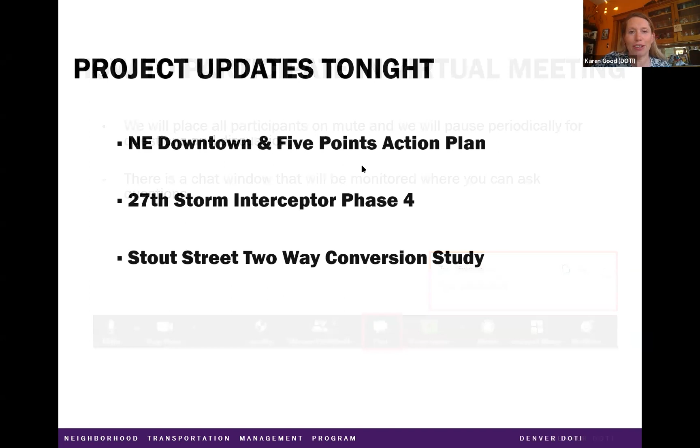Riley, if we can go to the next slide. So I've been mentioning that we're going over a number of projects tonight. One is the namesake, the Northeast Downtown and 5 Points Action Plan. We also have a project update on the 27th Storm Interceptor Phase 4 coming soon, and then the Stout Street two-way conversion study. So a lot of information, and we want to be able to have a conversation with you.

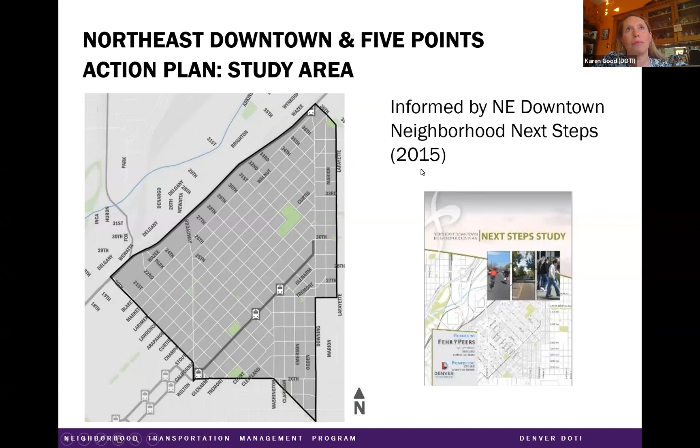So I am going to talk a little about the study area. I know a lot of you have been really engaged and very aware of the Northeast Downtown 5 Points Action Plan, and the study area encompasses 5 Points and goes a little bit outside of the Curtis Park 5 Points area, so that we're capturing the edges there. This is based on that Northeast Downtown Next Steps study from 2015, and pulls in information from a wide number and variety of other plans in the area.

So with that, a chance for you all to speak. We will be having 2 polling sessions, each with 2 questions during the course of this meeting. A polling window will pop up on your screen. Just follow the instructions to select your answer, and we'll close the poll in 1 minute. It should have popped up on your screen already.

There's a little clock ticking there to tell us a little bit about your relationship to the area and how you interact with the neighborhoods here, whether you live here, commute here, use it for recreation, school, etc. There's a little bar there so you can scroll down. There's a lot of info there, and it looks like we've got 50% of people participating, and I know a few people are just popping on. So we'll give it another couple seconds.

Looks like we've got a lot of folks that participated, and for question 1, we have the highest percentage of folks that live in the neighborhood. A few folks commute through, and people use it for recreation and shopping, events, etc.

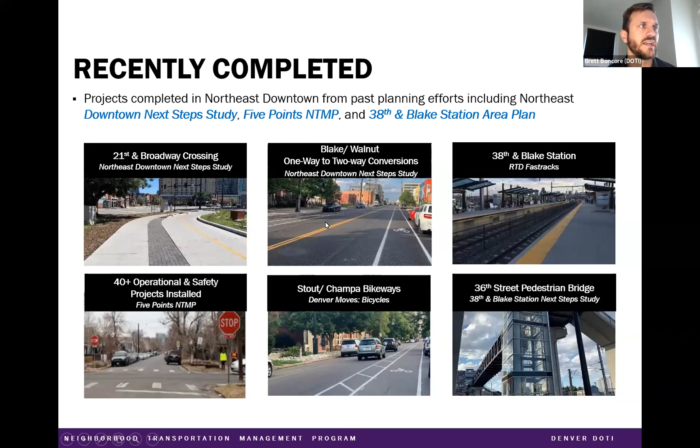corner that's going to be coming into the Northeast downtown and 5 Points neighborhoods. If you go to the next slide, if it works. Okay, cool. And these projects, like I said, they're coming soon.

We're actually in the middle of procuring a construction contractor for these right now. So they're right around the corner for us in our world here. And these came directly from the 5 Points NTMP action plan that occurred a couple of years ago. There's 6 projects that came directly from the NTMP plan.

You can see here just a couple highlights. The RRFB at 32nd and Champa, that's the rectangular rapid flashing beacon, basically helping to bring more awareness to the pedestrian crossing there right next to the park. And then as well as kind of enhancing Champa and Stout streets with some painted bulb outs and

making vehicle movements a little clearer, and converting a section of 28th Street just east of Welton to 2-way. That's the section between Welton and the Glenarm Rec Center and the Denver Health Clinic, where it's 1-way, converting

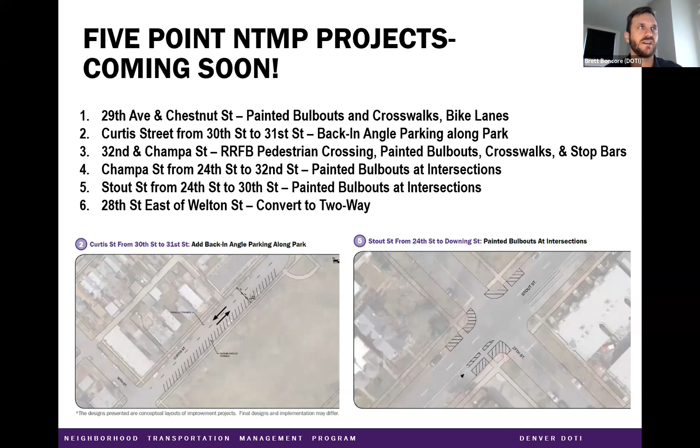it to 2-way, hoping to open up more access into that Welton Street business district and clarify some confusion there and some safety issues we're seeing there.

If you go to your next slide. This is just an extension of the projects that are coming soon. And I think in our last meeting, we mentioned this as well. It should be familiar to most, it's the expanded pedestrian plaza.

So this is at the intersection of Welton Street, 26th Ave, 27th Street, and Washington Street. And what we're doing here with Flex Post and Paint is improving intersection safety at that location by slowing down

turning movements, decreasing pedestrian crossing distances, but also we're getting some space to where we can actually activate that space with art, street murals.

And so we've procured a couple artists to help us do that, to install that street mural and help us activate that space, along with the community in

that area. In addition, along Welton Street, which is also coming around the corner, is flex post and paint bulb outs at some select intersections along Welton Street.

That's at 24th, 25th, 27th, and 29th. Similar to the Plaza project, these are smaller opportunities, but still opportunities to improve pedestrian safety and increase placemaking.

Those artists will be painting street murals in those as well. You can see a photo here on the bottom right of a recent similar implementation on Santa

Fe Drive. And then I just wanted to give a quick plug to the Stout Street two-way conversion study, which also came out of the NTMP, which will be talked about later in detail in this meeting.

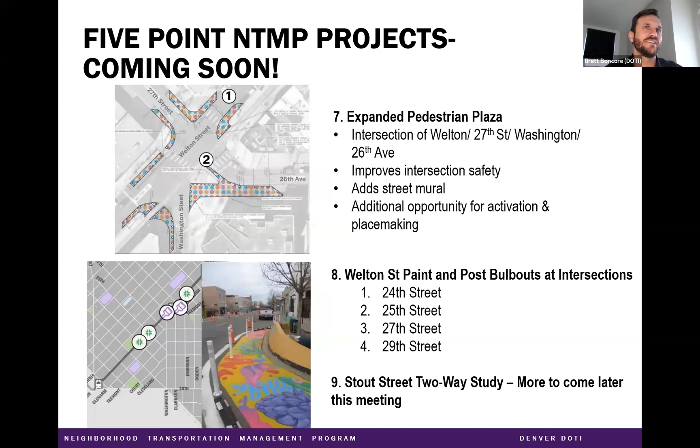And one quick thing before we pass the mic to Riley, Brett, can you explain our acronyms of what we affectionately call NEDFP and NTMP? Yes, sorry about any confusion there.

NEDFP stands for the Northeast Downtown and 5 Points Action Plan. That's the study area that Karen had presented earlier, encompassing all the neighborhoods in the Northeast Downtown Next Steps study. NTMP is the Neighborhood Transportation Management Program, a program that goes throughout all of Denver's neighborhoods, prioritizing them according to equity, multimodal demand, and safety to do neighborhood-level traffic calming and infrastructure projects.

Awesome, thank you so much. Riley, can you fill us in a little bit on the community survey results and process?

Absolutely, my name is Riley Lemie, I'm with DOTI, the Denver Department of Transportation and Infrastructure, City Planner. I'm going to talk about the Northeast Downtown 5 Points Action Plan process. This is a multi-year program looking at adding transportation infrastructure investments into both the Northeast Downtown and 5 Points neighborhood, a partnership between DOTI and the Denver Office of Economic Development.

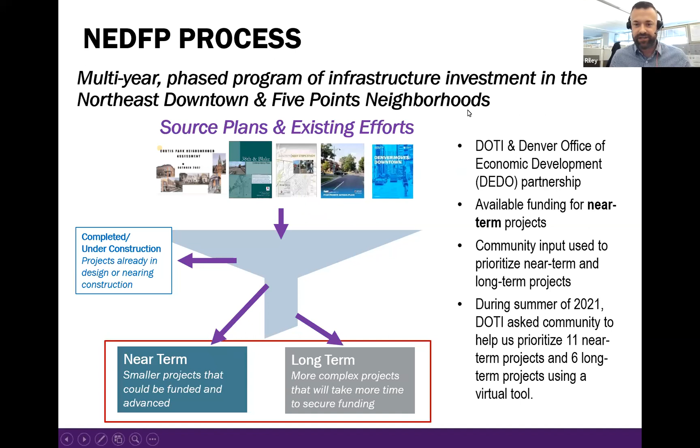To recap, the near-term projects shown on the map represent some of the different projects we asked the community to prioritize. This included everything from the permanent version of the 5 Points Plaza to a lane reduction on Welton Street, and other improvements geared towards safety, streetscaping, or landscaping. We asked the community to prioritize these improvements with the funding available to us, and did that last August.

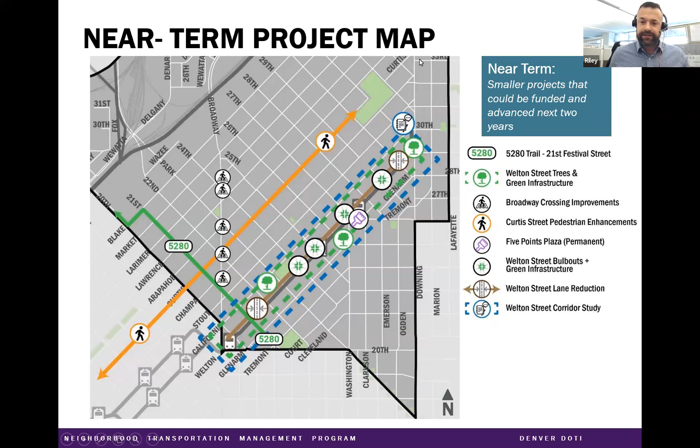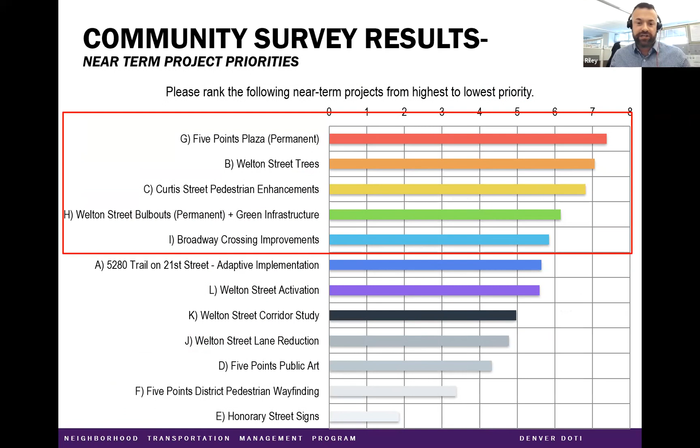As you can see on the graphic, these are the projects that rose to the top. We picked 5 projects based on what we heard, ones we're able to move forward with based on the near-term funding available from the partnership between DOTI and DEDO, as well as ones we can advance by leveraging other resources. I'm going to hand it off to Brett, who's going to go into some details.

I'm going to jump in with a question from the community. Since all of these projects were prioritized, will they still all eventually happen? That's probably a little bit hard to answer at this juncture, but maybe we can talk about that in relation to some of the things happening now and recently completed.

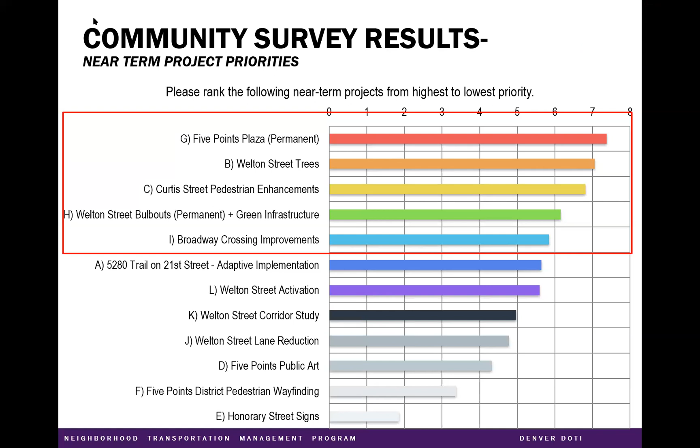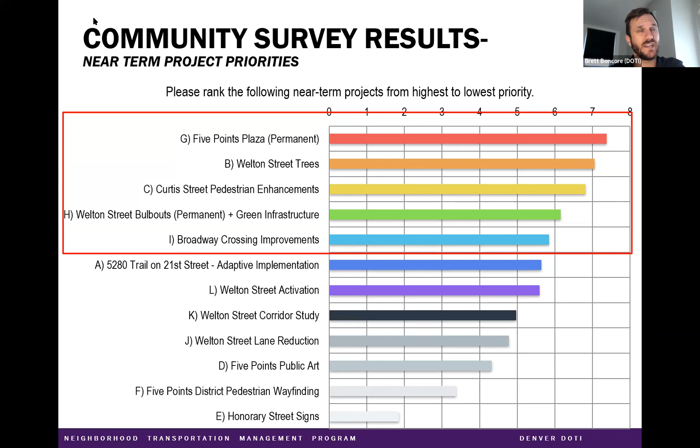We get Welton Street trees. So the short answer is, we have a limited amount of funding to advance. We knew at the outset that we weren't going to be able to do all of the projects on this list, which is really why it was important to hear from the community about which ones were most important to them, because we have a lot of projects and a limited amount of resources. What you'll hear later in the presentation is not that we're ignoring the rest of the projects that didn't get funding, but that these are still on our list to fund and pursue potential funding for in the future. These near-term projects are ones we're prioritizing and can move forward with near-term funds. These are ones that can actually move forward and will have funding through construction.

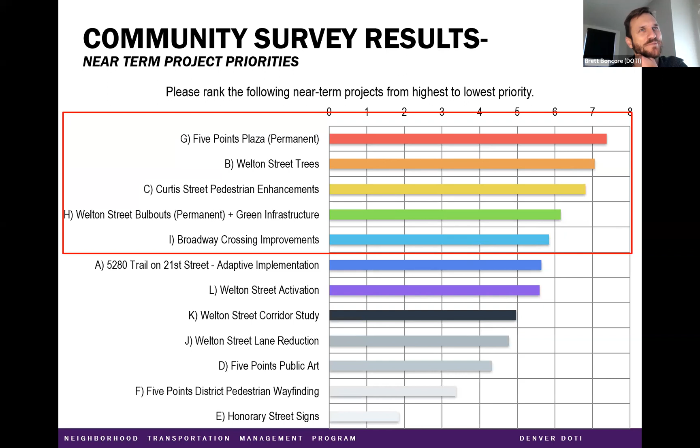Thanks, Brett. That dovetails perfectly into the next slide, which talks about the 5 projects we're able to advance from the community survey.

The first one is what we're calling the permanent 5 Points pedestrian plaza expansion. This was the highest priority project from the survey, the permanent expansion of that 5 Points intersection plaza, at the intersection of Welton Street, 26th Ave, 27th Street, and Washington Street.

I mentioned that we had an upcoming project to expand this plaza with flex post and paint in the near term, in the next couple months. Well, that's a pretty temporary version of that, right? That's an adaptive version with just those flex post bollards and paint.

What this project would do is, once we get to do design and are able to construct, probably a couple of years out, a few years out, we would make this permanent through the use of actual concrete. So this would be like the photo, like the graphic here is showing: raised concrete pedestrian islands with those bulb outs.

Those are the things on the corners that kind of help to clarify the vehicle movements. This also slows down vehicle turning speeds, which in the end really enhances pedestrian safety. That's paramount for us at DOTI.

In addition, the bulk of this though is to really expand that pedestrian plaza that's right there. This is, if you can imagine, right in front of Melody Market, which just opened up at the Point, across from Famous J's and all those businesses right in that area. There's a lot of synergy there, especially with the events.

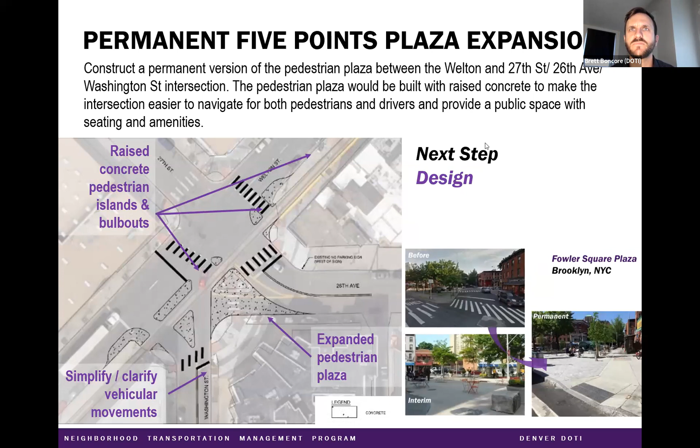Another important priority of the community that we saw from the survey is for Welton Street trees. This is to add street trees to the Welton Street corridor. This is actually, as some of you might know, an existing effort by forestry to renew the tree pits along Welton Street.

To further increase the green canopy in that area. With this currently being underway, really our next step is to continue to coordinate with forestry to fill any gaps that they have and find any opportunities for us to add value to that project and get that green canopy increased. Next slide.

This is another big one. Next project that was prioritized by the community was the Welton Street Streetscape and Green Infrastructure project. Similar to the Plaza expansion project, this project would add bulb outs—those extensions of the curb into the street—to decrease pedestrian crossing distances, which increases pedestrian safety. In those bulb outs, like you're seeing in that photo there, add trees and green infrastructure at the corners.

This not only adds to placemaking in that area, but it also gives vertical elements and helps to even more slow down turning movements and make it a safer place for folks. I mentioned it earlier. Brett?

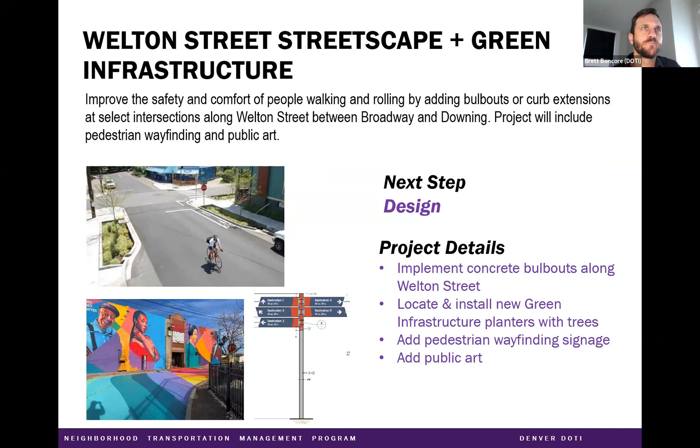Next project is Curtis Street pedestrian enhancements. This came from the Northeast Downtown Next Steps study, and will implement bike and pedestrian safety enhancements at select intersections along Curtis Street, specifically between Broadway and 30th Street. This would typically be in the form of bulb outs and other traffic calming. Next step would be design on that one as well.

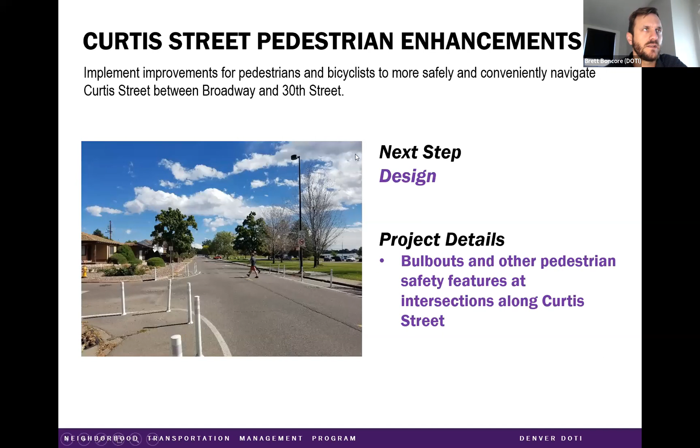This project, the Broadway crossings improvements, is our last prioritized project that we have near-term funding for. This came out of Denver Moves Downtown, an effort that our very own Riley Lemie led, to construct pedestrian and bike improvements at select intersections along Broadway. Broadway is a challenging road between the diagonal grid and the rest of downtown.

So we're looking to design and implement safety enhancements like bulb outs, curb extensions, median islands, and changes to some signal operations favorable to pedestrians at these 5 intersections you see on screen. This picture is just an example of one we did on Colfax more recently; it'd be similar improvements.

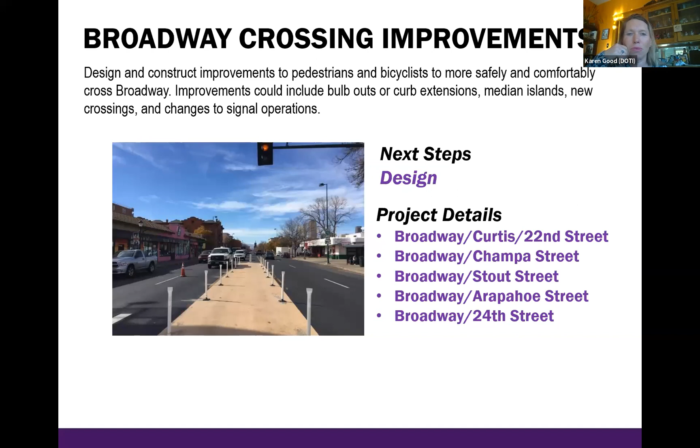Brett, one question that's come up is what is the specific timing for these near-term projects? I don't know that, as you can see most of these are in design, and we don't have a lot more detail on construction timing. That kind of gets to our next steps slide, which we'll explain at that point, since it's all kind of one conversation.

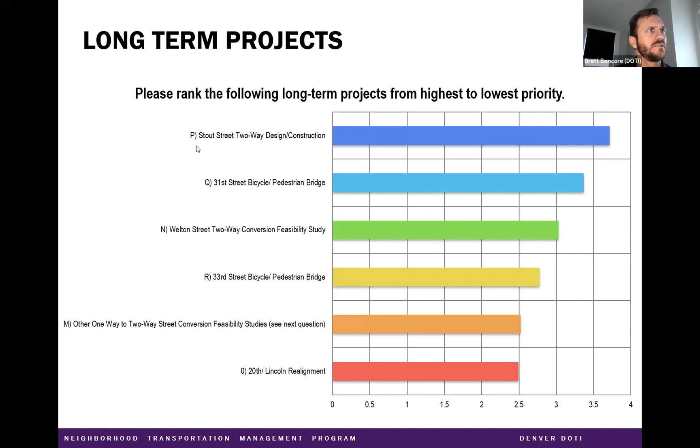As far as next steps, we're at April 6th, that's where we are right now. We promised to report back and present our next steps. This summer, we're going to make sure all our funding is in order, start scoping out these projects, and procure a design consultant. The first thing that needs to happen is final design to make sure everything checks out. Starting in the fall is when we're hoping these design projects would start, maybe bleeding into winter, is when you'll start to hear more activity around each individual project. Construction would happen sometime after that, probably 2023 and beyond, maybe even 2024 for some of these.

I think we've hit most of the questions during our conversation. I noticed somebody has a comment about Stout two-way conversion, so we'll talk about that, we have a whole section on that and a project team waiting to fill you in. And then somebody who jumped on late was wondering about the status of the bike ped bump out or similar for 33rd and Lawrence.

Brett, I am not remembering that specific element, the bike ped bump out at 33rd and Lawrence. I'm sure you do, I sure hope you do.

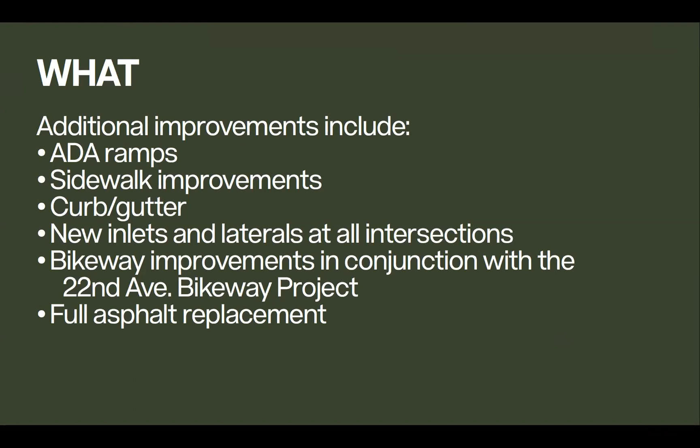And what are we doing? Basically we're going down the street, installing a large pipe to replace the pipe that's in the ground now. On top of that, we're doing new ADA ramps, sidewalk improvements all along the corridor, new curb and gutter, new inlets, laterals at all the intersections. I believe we're going about 4 blocks on phase 4. We're also helping with some of the bikeway improvements in conjunction with the 22nd Avenue Bikeway project. And the big thing—it'll be all new asphalt all the way down from basically 25th Avenue to just south of 22nd Avenue. So it'll be a big improvement.

You don't say. Absolutely, we're going to become friends with everybody in the neighborhood. I'll be the one on site, so if you see me running around on site, feel free to stop me.

Should we take any questions coming in? No, that was the big one. Okay, let's move forward and open it up. You again, Aaron, you know. Okay, no problem.

So here's a slide that shows the why. This is 27th Street and the 5 Points intersection on Welton. You can see there's quite a bit of surface runoff that ends up inundating the storm system there, causing flooding to residents as well as businesses. To the right, you can see the entire basin that drains down into that area, called the Lower Montclair Basin. It's a pretty wide area, so the amount of water that ends up in that intersection is quite a lot.

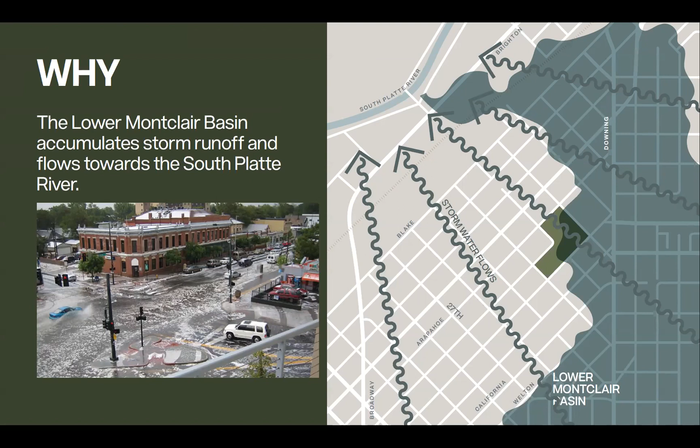So that's why we need the larger storm sewer pipe.

So the when - we're hoping to bid this project this summer. We don't have an absolute deadline, but it will happen sometime this summer. We do expect construction to begin in early 2023 - January, February, March, somewhere around there.

This is some of the how. This is very similar to what you'll see on Washington Street, and probably similar to what you've seen on our current project, phase 3. We have large equipment that needs to come down the street to install this large new pipe in the ground, and this is the shoring system that keeps all the workers safe underground. It's pretty invasive - we come through, trim all the trees, remove all the curb and gutter in the road, and then put the pipe in the ground. It's very, very involved, and very loud.

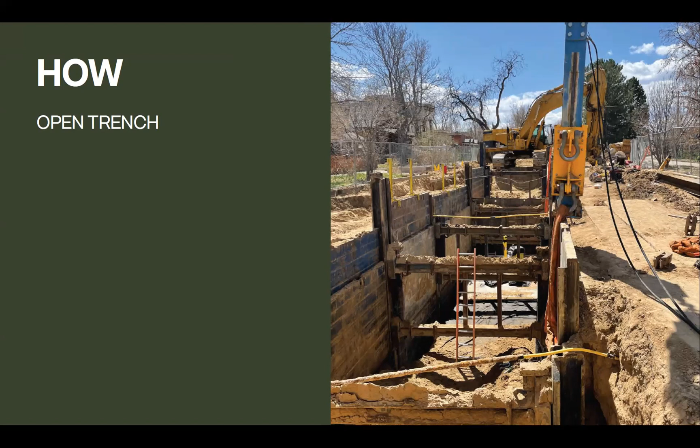But we do try to march down the road as quickly as possible so we don't disturb anybody for too long - and safely, right? Yeah, absolutely. Safety is our number one goal, and that's why we have the fencing on the sides as well.

Impacts: we're looking at closing only 2 blocks and 2 intersections at a time. Mainly that's to give the contractor room to spread out with their equipment and materials, and room for storage. Pedestrian access to residents and businesses inside the project area will always be open, and we'll have signage clearly defining any detour routes, whether for pedestrians or traffic.

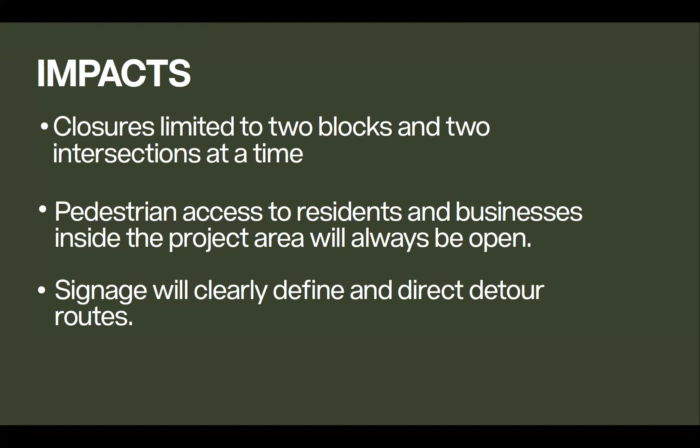Great, and I saw somebody taking a picture of the screen - we will post this meeting info on our website so you'll be able to get it there. I haven't seen any questions. David did have a very fine comment that they must have hired very short masonry workers over 100 years ago.

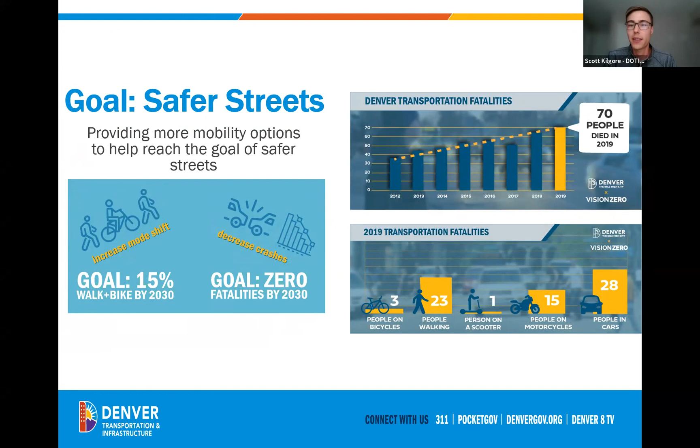So our goal here is to create safer streets. DOTI is really all about safety. One of our top priorities is Vision Zero, having zero fatalities on our streets. And that's really a main driver of this project and in all the work that we do. So if we can go ahead and jump to the next slide.

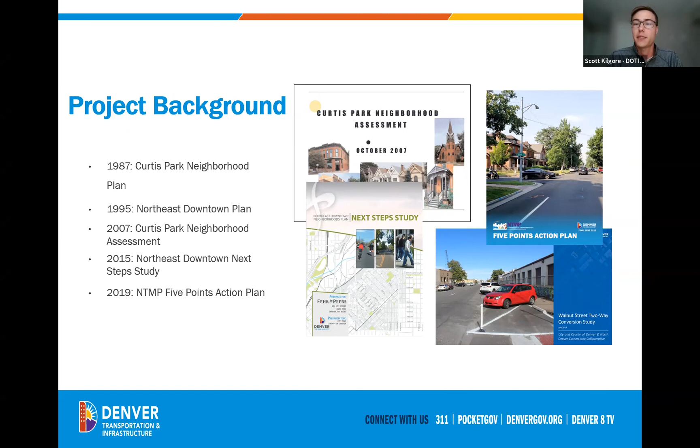As I was saying, the Stout Street two-way conversion study has been identified in a number of different planning efforts in this neighborhood, going all the way back to the 1987 Curtis Park neighborhood plan, and was further mentioned in 1995, 2007, 2015, and 2019. Most recently, out of the Five Points action plan and the prioritization process of different improvements in the neighborhood, this project really rose to the top. So that's really what brings us here tonight and why we're looking at this.

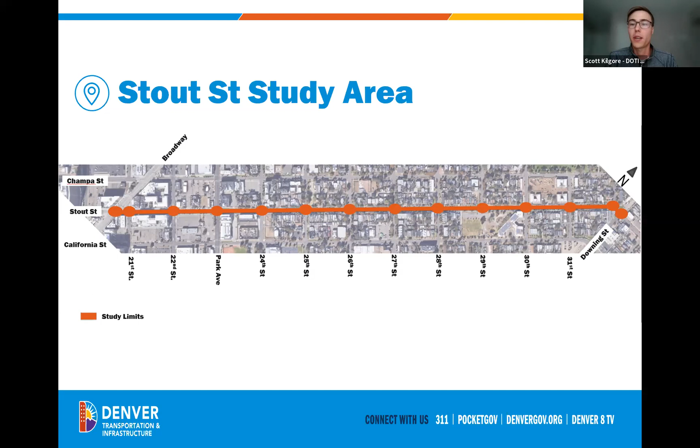The study area we're looking at for the Stout Street two-way conversion study is Stout Street between Broadway and Downing. Part of this project is figuring out whether all of this stretch should be converted to two-way, or just some of it. So that's really one of the main reasons we're doing this study, to flesh out those details and get a better understanding of what we're going to do here to improve Stout Street.

So next, we've got a couple polling questions. Are you ready for the polling? It's polling time again. Oh boy.

So a pop-up window is going to happen. We just did this, so for anyone new, please answer the pop-up window with the poll, about what's your relationship with Stout Street? Are you besties with Stout? Are you enemies with Stout? Do you live on Stout? Do you use it for recreation? Is it part of your bike route, your running route, your walking route, where you take the bus, where you go to school? You can select all of the above. So let us know, that's just helpful for us to understand.

Gerald, yes, you are welcome for referencing how many years the Stout Street two-way conversion has been part of the conversation. I know it was a healthy conversation in the Stout Street, in the Curtis Park assessment. So it looks like we've got a lot of answers, and the most popular is: I live along or near Stout Street. So thank you for that.

And then folks recreate and go shopping and commute and access transit. Doesn't look like we have any school goers here. And then let's do question 2 for the poll.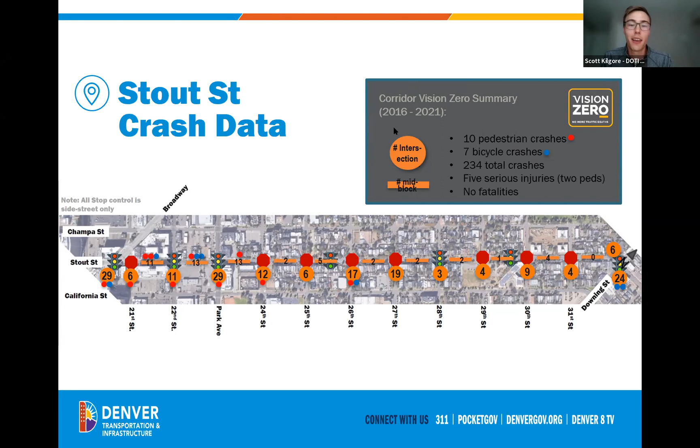Scott, I think we'll get into it, but a lot of folks are talking about existing conditions for cycling and concern about how comfortable that is, and you're just jumping into that now. So this will help clarify for anyone that doesn't ride on Stout what the conditions are on the bike facility there. Totally, yeah.

Yep, that's definitely the next thing we're jumping into. Now we're looking at the corridor along its length, as if you're traveling it. Today, in the southern section between Broadway and 26th, the bike lane runs along the curb, with a parking lane separating it from the vehicle travel lanes on Stout. So there are two vehicle travel lanes going northeast bound, with parking on either side, and then the bike lane. We call this a parking-protected bike lane, because the parked cars physically separate cyclists in the bike lane from moving vehicles in the travel lane.

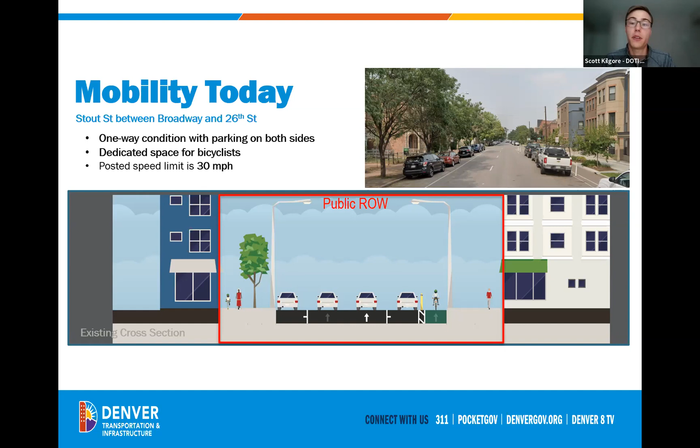If we jump to the next slide, one of the existing conditions people have picked up on is that the bike lane configuration changes at 26th Street. From 26th to Downing, the vehicle parking lane is now up against the curb, and the bike lane is separated from vehicle traffic by a buffer space instead. That's a quick high-level view of what's going on in the corridor today and the configuration we're working with as our existing condition.

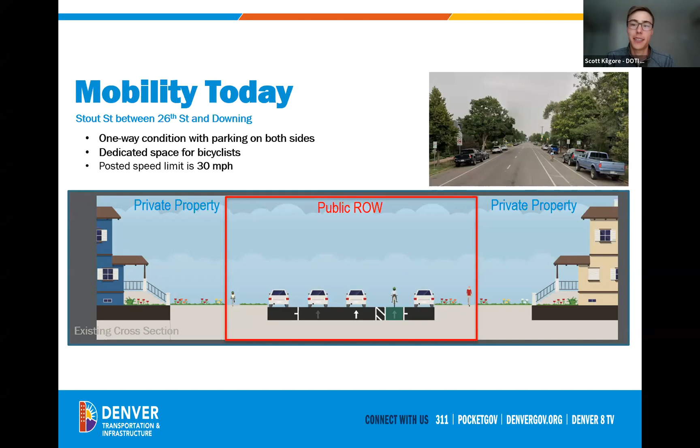Next, we're jumping into what a future two-way Stout could look like. We're taking one of those northeast bound vehicle travel lanes and changing its direction, so now those vehicles travel southwest, and the associated parking lane on the left side of the corridor changes direction as well. So we're retaining two parking lanes and two vehicle travel lanes, but now one travel lane goes northeast bound and the other goes southwest. The bike lane is retained going northeast bound. With this project and the opportunity to reconfigure street space on Stout, we're looking to keep that parking-protected bike lane configuration throughout the whole length of the corridor, extending the space where cyclists are separated by the parked vehicle lane from moving vehicles in the travel lane.

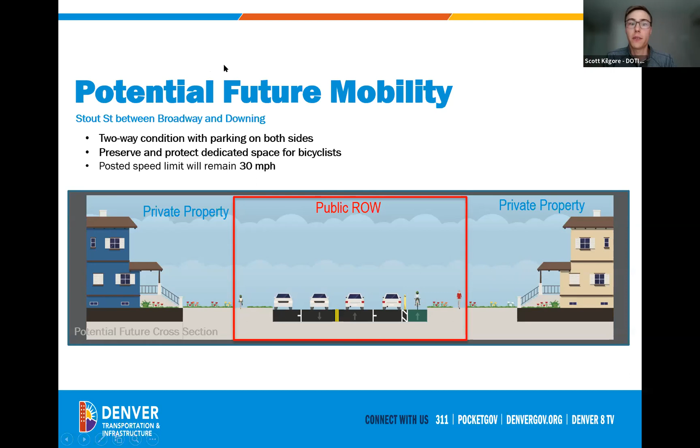Now that we have a sense of what we're looking at for the corridor, we can get into some potential benefits and why we're looking at doing this in the first place. One thing we've heard repeatedly from the community is a desire to calm traffic on Stout and create a lower stress environment that responds to the residential character of the area a bit more—that's one of the largest benefits of this two-way conversion. It also has safety benefits, since lowering speeds creates a more forgiving, safer environment for all road users. It's also a more familiar context for people crossing the street or driving than a one-way street going through a neighborhood. And it will improve circulation in the neighborhood, connecting destinations more directly than having to circle around on one-way streets.

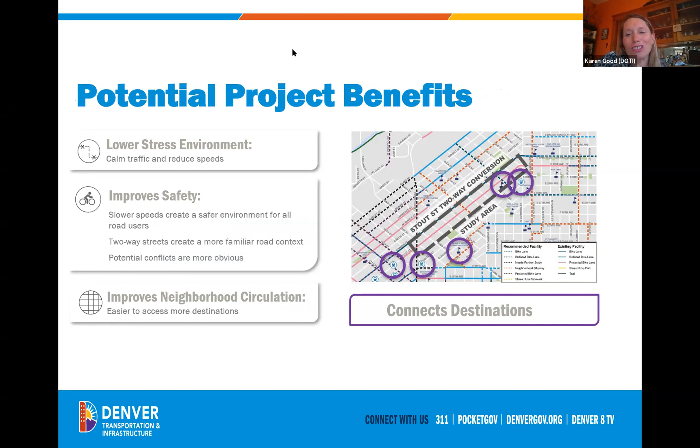Hey Scott, before we go to the next slide—actually we can go to the next slide—but a couple of questions have come up regarding people getting confused in the area with different streets' one-way to two-way conversions and turning the wrong way. Is that something we'll be looking at, to make sure things are clear? Obviously we'll look at the chat and investigate some of the different one-way, two-way issues, and if they're not on Stout Street but in the rest of the neighborhood, we'll share that with our area engineer team.

Do you have any thoughts on what you're looking at, and the benefits you've talked about with that two-way conversion because it's more familiar? Are there some other pieces there with turning from some of the numbered streets?

Yeah, I think one thing that this project would also look at is signage along the corridor. That's something we would definitely look at updating to help direct people more clearly through this area.

And then there are some questions about speed, and maybe we can add that in the future to our street operations questions as to what we're looking at with speed, folks saying that 30 still feels pretty high. And then some questions about the rest of the two-way streets.

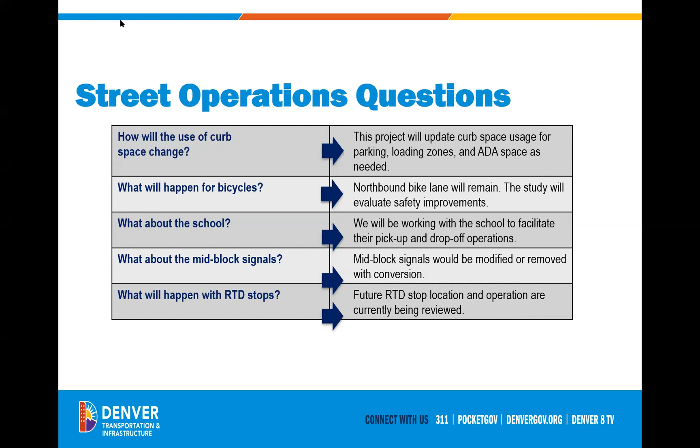I just want to touch on that point, because I think it's something everybody wants to be really clear on. So, because this isn't going to be included right away as part of any kind of reclassification, does that negate any discussion whatsoever about a reduction in the speed limit on Stout Street? Is it firmly 30 miles an hour as a result, or are those still two separate things? Two different things.

So I was just getting to that. Reclassification to a neighborhood street is part of that bigger citywide effort. Looking at the actual speed limit, say taking it from 30 to 25, that could still be something we at least get baseline data for. The way we're currently looking at setting speed limits is we would do the conversion, and then we would be studying and doing data collection on that roadway to see what the speed limit can be.

A really great reference point for folks, which is a walking distance away, is Walnut Street, and Brett and I both worked on that. For those who want a recent example of a one-to-two-way conversion, Walnut Street is a good example. We did that back in September of 2020. Just changing it to a two-way conversion significantly changes the feel of the roadway and slows traffic down, as we can see.

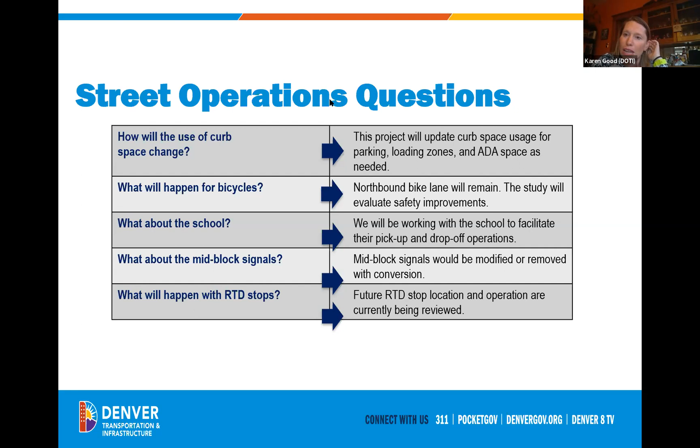I wanted to jump in real quick on arterials reclassification. I'm helping out with Denver Moves Everyone, and there are a lot of different things tied to whether something is considered an arterial, collector, or local street—things related to the type of funding we're eligible to receive, the type of traffic calming improvements we're allowed to do, a whole gamut of different things. That's why it's important for us to take a more holistic policy review about how we're classifying streets, which is why we're doing it at a citywide level within Denver Moves Everyone. One of the goals is to make sure street classification meets the neighborhood character and intent. That's something we're trying to take a deeper look at, so I wanted to add those details in.

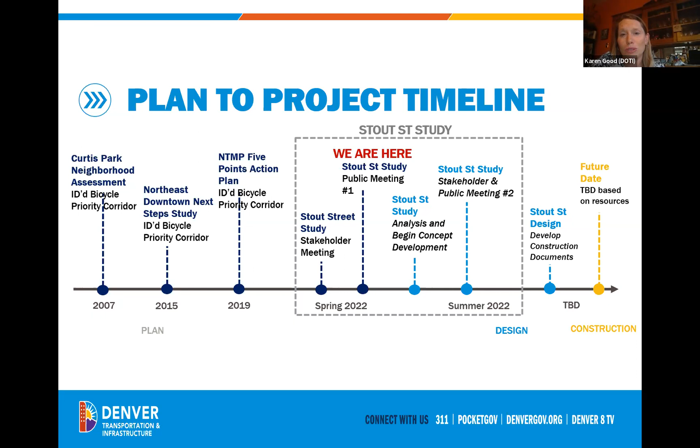Thank you, and be consistent, because consistency is key. I'm hoping somebody can pop the bit.ly for Denver Moves Everyone in the chat, because that would be a great resource for folks. We're doing a big push to engage more people in Denver Moves Everyone, so there are lots of opportunities coming up, including coming to events in the neighborhood. So with that, Scott, let's talk about what's happening next with the timeline.

This graphic shows the whole life of this project and where the Stout Street study fits within that. As we touched on earlier, this project has been identified through a number of planning efforts in the past. This study specifically kicked off with a stakeholder meeting earlier this spring, and today we're at our public meeting number 1. Our next step is working through the analysis, doing traffic models and other elements we've discussed, and developing concepts.

This summer, we're going to come back to our stakeholder group as well as the public to share some of those concepts and get feedback before the study makes its final recommendations for Stout Street. After the study wraps up, the recommendations move into design and then construction, as funding and programming allows. The outcome of this study, by late summer, will be a document outlining recommendations for what the future of Stout Street should look like. So if we can jump to the next slide here.

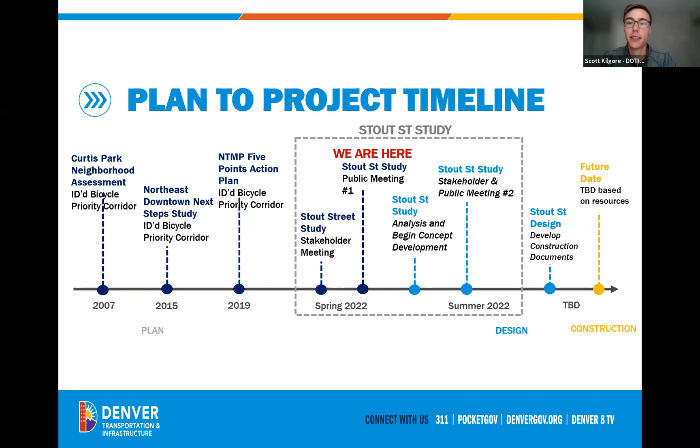So that's a view of where this project is going and where we're headed. I think that wraps us up with Stout - well, it wraps up the whole kit and caboodle. But I do want to check the chat again to see if there are a few questions.

We have one question: what's the current classification of Stout? Since we're diving into classification, is it a collector, is it an arterial? We know it's not. Scott, can you let us know? Yeah, so today Stout is classified as a residential arterial.

Not one that everyone's familiar with. And thank you everyone putting their emails in the chat, we really appreciate that. There was a teeny tiny gap in recording, but we'll fix that and make sure we add everyone. Anthony Aragon - we've got a lot of folks in the background here that are amazingly helpful, and Anthony is one of those.